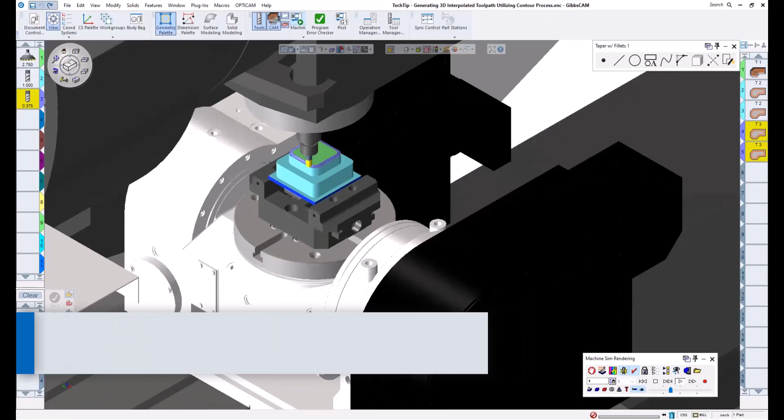In this video, I will be going over how we can generate some basic 3D toolpath while utilizing only a contour process and wireframe geometry. This is extremely useful when needing to add a top or bottom radius to an edge, and it is also beneficial when working with tapered walls and large or deep chamfers.

Of course, there are certain tools available for these types of features, but in a shop setting, these tools may not always be readily available. Utilizing the wall choices aspect of a contour process can get the job done with more common tools we may already have on hand. With that being said, let's get started.

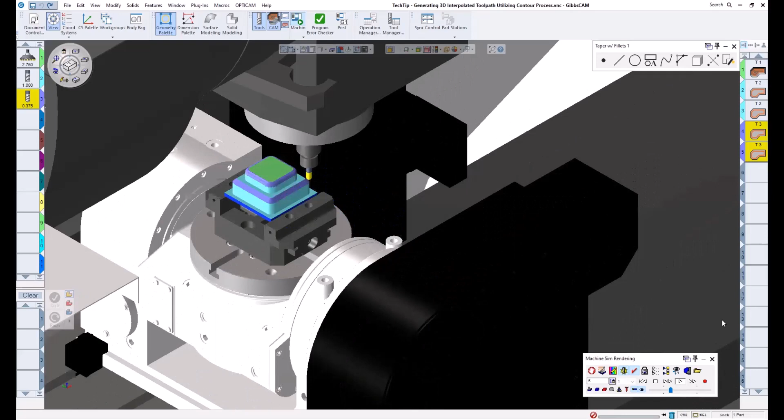When I turn off my rendering, you can see I have a solid model here. This is only for reference and for geometry extraction. A solid is not needed to generate this toolpath. We will be working with geometry only. If you don't have a solid to extract any geometry from, you'll need to draw it out yourself and ensure that it is located properly. Once that is done, we can begin building our process.

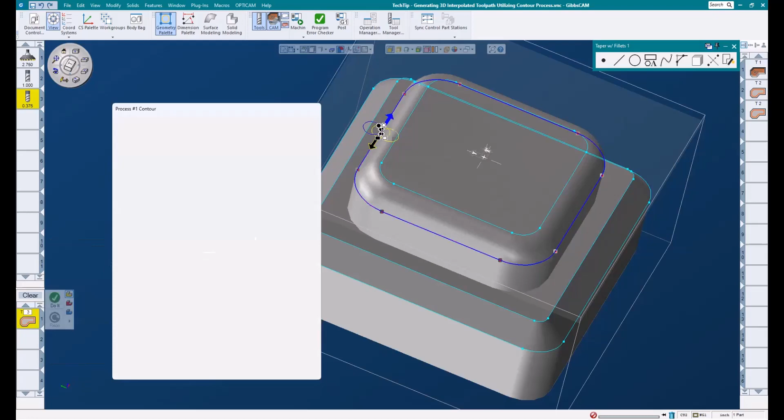For this example, I'm going to add this 1/4 inch radius to the top of our part using a ball end mill. When working with the top radius, we need to use the outermost shape of our feature, which would be this bottom edge here. I'll take my 3/8 ball end mill, and I'll load a contour process. I'll update my process parameters and enter my depth values.

The way I get my finished Z depth is by subtracting the radius from my surface, and in this case it would be 1/4 inch. Next, I will subtract the radius of my cutting tool from that value, which is 3/16. This will allow the edge of that ball nose end mill to come down and completely clear the radius as it follows this feature and gets to this depth.

And then after that, I'll take it just a little extra to ensure that our tool does travel past the bottom of this feature and doesn't leave a lip around this island. Once I have my depth dialed in, I'm going to click on this button here. This will open up our wall choices dialog. You can see here we have a couple of strategies. I'm going to go ahead and choose taper with fillets.

This allows us to mill a top or bottom radius, an angled wall, or a combination of any of these three features. For now, we're just looking at top fillet, so I'm going to zero these other ones out. I want to add a 1/4 inch to my top fillet. Below that, there are even more options to help control this toolpath. We can choose to cut from the top down or the bottom up, and we can select between use D-step and shape step.

A good rule of thumb is to use D-step when roughing and shape step when finishing. I will show an example of this in just a moment. But for now, let's choose D-step and enter a value of 0.025. This number can be more or less. It all depends on what type of surface finish you are looking for. A larger step is not going to output as much code, but of course the surface finish won't be as nice as a tighter step over amount.

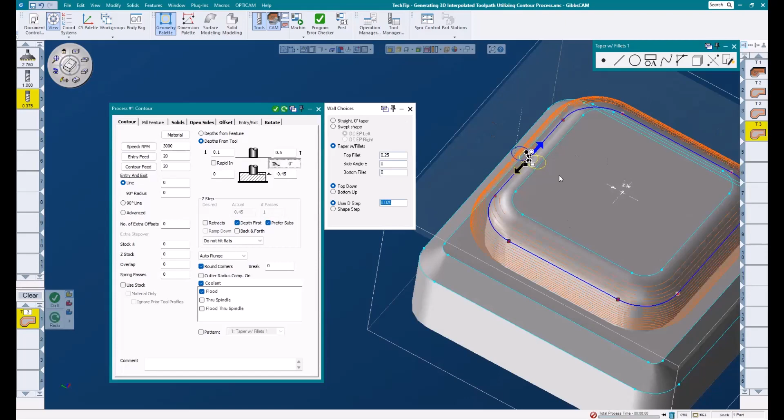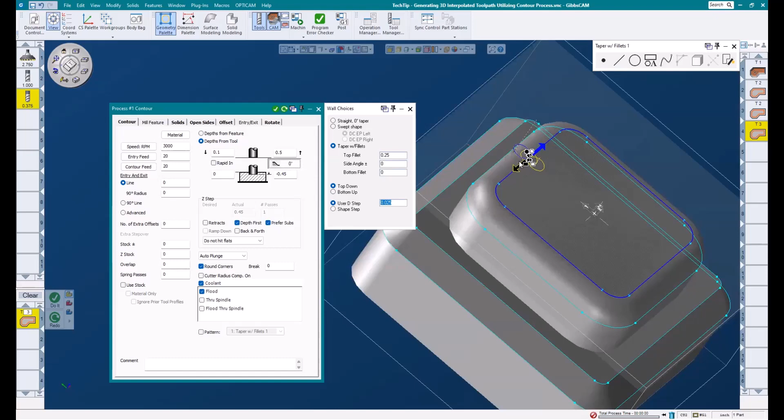And you can see we get some pretty nice toolpath. It makes one pass, steps down and out, makes another pass, and continues that pattern as it follows the shape of that 1/4 inch radius. Now, notice what happens if I select the wrong piece of geometry and redo this operation. It disappears, or rather, moves in a 1/4 inch and begins to gouge our part. So that's a good example of why it's always important to make sure we're using the correct piece of geometry.

Now, to speak more on the difference between use D-step and shape step, I'm going to look at the front of my part and zoom in on this radius and toolpath. And I'm going to click the shape step button in my wall choices dialog. Once I select shape step, another box opens up for ridge height. This allows us to enter a desired ridge height we are trying to achieve.

I'll hit the redo, and you'll see our toolpath change. If I use my hotkeys to flash back and forth between undo and redo, you can see the difference. It now has more passes. This is because D-step is considered a constant step, whereas shape step allows Gibbs to vary the step amount throughout the feature in order to achieve our desired ridge height.

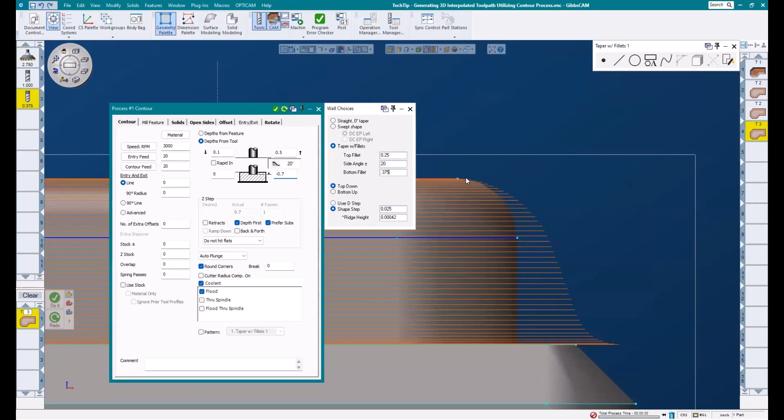To show a little more capability with this feature, I'm going to take my final Z depth to the floor of this part, which I know is negative 0.7. Then I'm going to add a 20-degree side angle and a 3/8 bottom fillet and hit redo. You can see that this toolpath is blended smoothly between these three features.

But I'll go ahead and put this back to where I was for that radius, hit redo, and then run the rendering. And you can see we get a nice, smooth 1/4 inch radius on the top of our part without having to perhaps dial in a round over, which can be tricky at times.